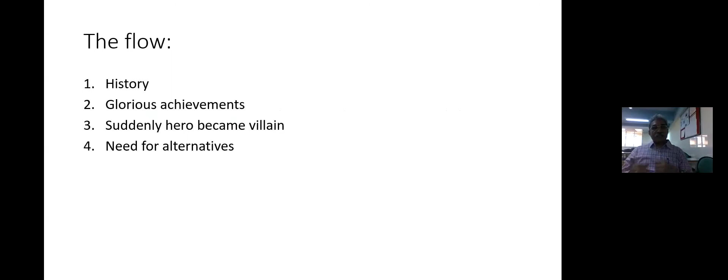So let me start with concrete for future. The flow of my presentation will be something like this. First, we will go through some history, then some glorious achievements, then we'll see how the once hero has become villain, the need for alternatives, the effort taken all over, then our contribution, and then conclusion.

So here, let us start with the history of cement concrete. Now we are familiar with cement concrete so much that we tend to forget from where that concrete has started. It is way back in 6500 BC, and to our surprise, in UAE, the earliest recordings of concrete structures by Nabataea traders in the region of Syria and Jordan. They created concrete floors, housing structures, and underground containers, which they used for grain and sometimes for water.

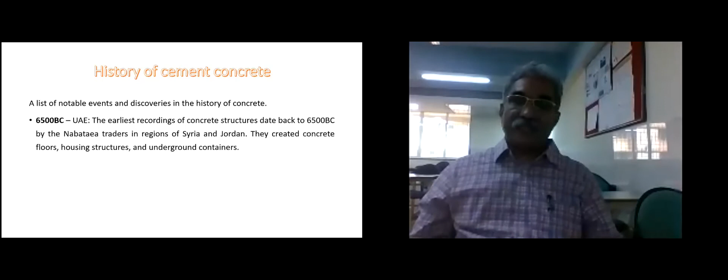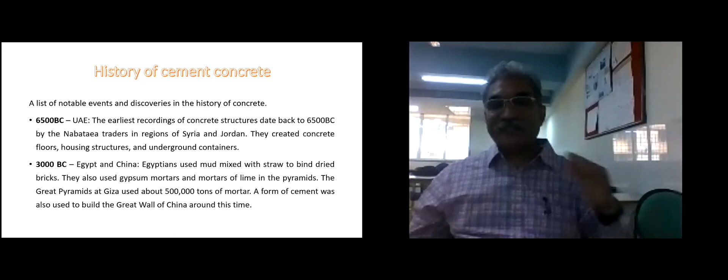Then in 3000 BC, in Egypt and China, we all know about Egypt, pyramids and all. Egyptians used mud mixed with straw to bind dried bricks. They also used gypsum mortar and mortars of lime in the pyramids. This is available in history, and the documents are also available. The Great Pyramid at Giza used about 500,000 tons of mortar. A form of cement was also used to build the Great Wall of China around this time.

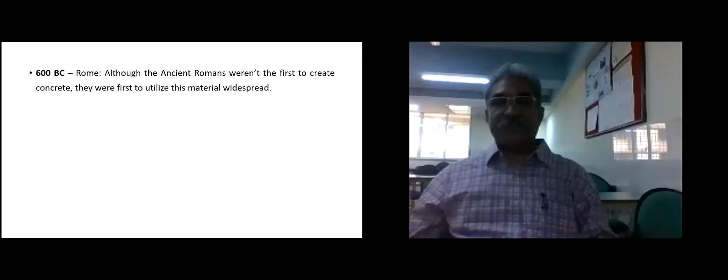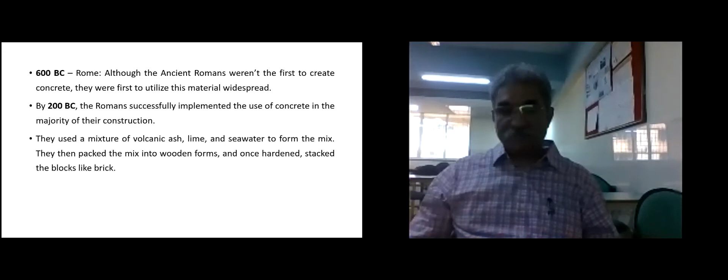Now coming closer, in 600 BC, Rome. Although ancient Romans weren't the first to create concrete, they were the first to utilize this material widespread. In 200 BC, Romans successfully implemented the use of concrete in the majority of their constructions. They used a mixture of volcanic ash, lime, and seawater to form the mix. They then packed the mix into wooden forms, and once hardened, stacked the blocks like bricks. After more than 2,000 years, Roman concrete structures stand tall due to their ingredients colliding with Earth's natural chemistry.

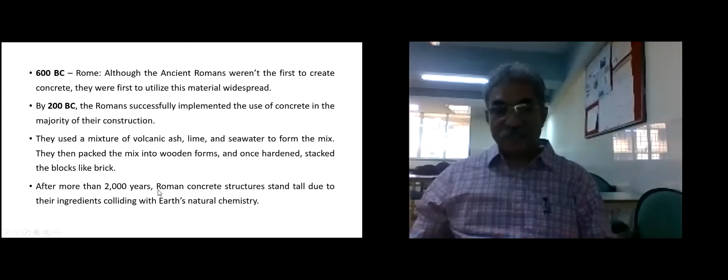So this is very important, we need to remember this, and we'll have to act on this only now, as the time is again changing.

So technological milestones, if we look at this: during the Middle Ages, concrete technology crept backward. After the fall of the Roman Empire in 476 AD, the technique for making pozzolana cement was lost until the discovery of manuscripts describing it was found in 1414. This regenerated interest in building with concrete.

In 1824, we all know Joseph Aspdin invented Portland cement by burning finely ground chalk and clay until the carbon dioxide was removed. Aspdin named the cement after high quality building stones quarried in Portland, England, because this quarry was situated in Portland, and therefore he named it Portland cement.

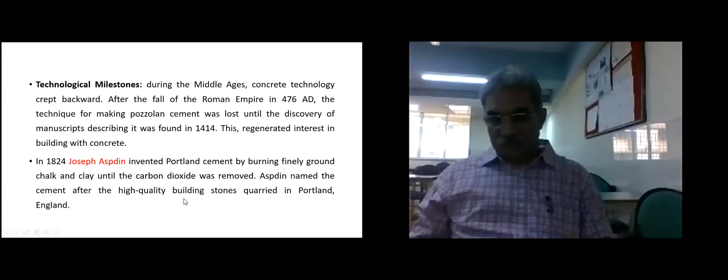In the 19th century, concrete was used mainly for industrial building, not for housing. The first widespread use of Portland cement in home construction was in England and France between 1850 and 1880 by Francois Coignet, who added steel rods to prevent exterior walls from spreading. This was the start of reinforced cement concrete.

Now, if we look at the timeline: in 1830, lime and hydraulic cement was produced for the first time, in Canada. In 1849, reinforced concrete was invented by Joseph Monier. In 1854, the first home constructed using reinforced concrete was built in England by William Wilkinson. In 1889, the first reinforced concrete bridge was built.

In 1891, George Bartholomew poured the first concrete street in the US, and it still exists. In 1902, Auguste Perret designed and built an apartment building in Paris using steel reinforced concrete. In 1904, the first concrete high-rise building, called the Ingalls Building, was constructed in Cincinnati, Ohio. In 1913, the first ready-mix load was delivered in Baltimore, Maryland.

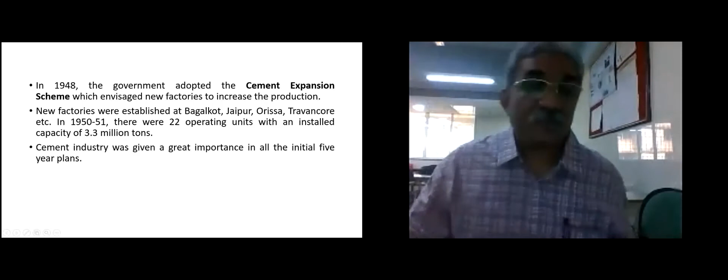See how much importance was given, that it was a major commodity in our five-year plans. The target of the first five-year plan was to raise the installed capacity to 5.4 million tons, which was achieved. The industry has grown many folds since then.

Many of our listeners might know that in that particular era, cement was on rationing. If we wanted to build a house, we needed to take permission and get a sanction for the amount of cement, and because of that, black marketeers were there—it was a great black market business at that time. I remember this because, though I was a child, I was interested in this industry since the beginning, and finally I became a civil engineer.

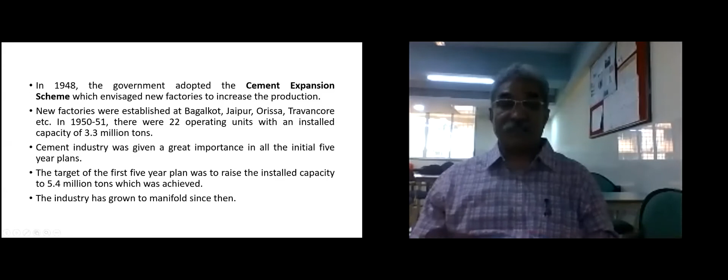Now, because of these great achievements, we have given so much emphasis on cement production, producing cement and concrete, and constructing so many buildings, creating so many facilities for human beings.

Now, how has this happened that this hero of ours, cement concrete, has become a villain, and why do we need to treat it as a villain?

The first thing is manufacturing. This stone-like building material is responsible for 7% of global carbon dioxide emissions, which is more than what comes from all the trucks in the world. That means if we stop all cement industries in the world, we would reduce global carbon dioxide emissions by 7%.

So this is an alarming thing, and because of this, the greenhouse effect is looming over the entire earth. Very recently we experienced in our Chamoli district in Uttarakhand that a great glacier has fallen, and I don't know what we will hear in days to come, because more than 150 people are still missing.

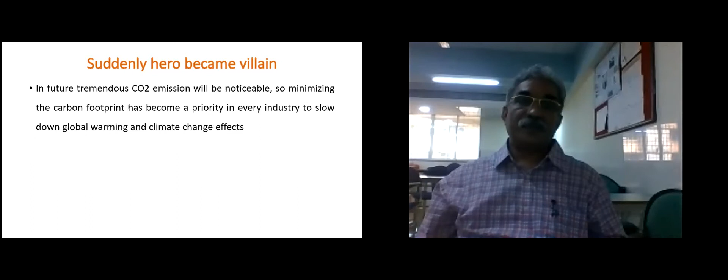Now, very important question: who is responsible for all these things, whatever has happened? So the obvious answer is we. We are responsible. Now, in what way are we responsible? How can we blame ourselves?

The main reason is we have increased our greed to the extent that even today we are unable to see the end of it. We have become so greedy that a family earning above average will start thinking of buying or constructing a home, and we don't want to live in a joint family. We have become nuclear families, and because of that each person now has two dwelling houses - that is our greed. One house in Mumbai, one nearby as a holiday home, and one more at our native place. So our greed keeps increasing and there is no end to it.

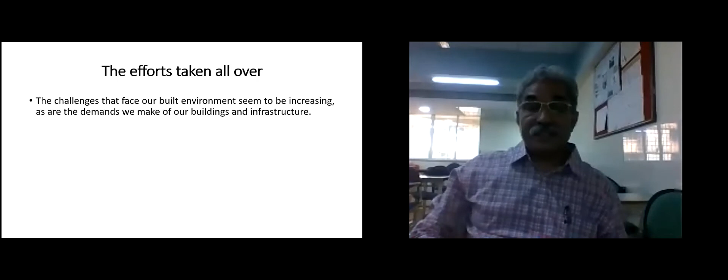We need robustness and solidity to feel safe and secure. We must build in flexibility to climate change and be able to deal with overheating, flooding, and storms, all in an increasingly urban environment where high density housing can make some of these issues worse. We must ensure solutions are low carbon, material efficient, and without compromising quality and performance standards such as fire safety and non-combustibility.

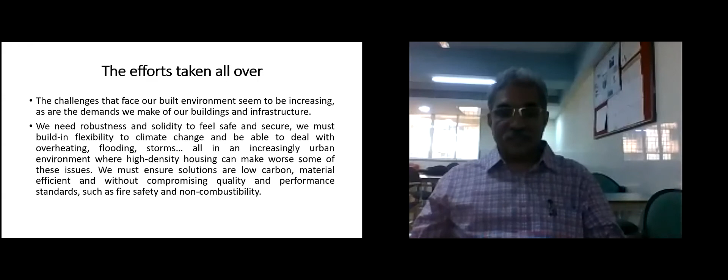So these are our requirements, and for that we need to pour more concrete. So this is a vicious circle, and we are supposed to put a full stop somewhere. So now let us see some innovations made in this direction globally.

So the first one is self-healing concrete. There are many researches going on in self-healing concrete. Then 3D printed concrete, eco-friendly concrete, pervious concrete, Martian concrete, living concrete, and graphene - that is one of the substances we will be using in concrete.

Then polymer concrete. So self-healing concrete - this is a concept based on the fact that no matter how carefully concrete is mixed or reinforced, it eventually cracks. And those cracks can lead to collapses.

Now, how do these cracks lead to collapse? We know that because of a crack, moisture content enters the concrete and reaches the reinforcement. The reinforcement gets corroded. That corroded material of reinforcement, being ferrous material, occupies more space, and because it occupies more space, it widens the crack.

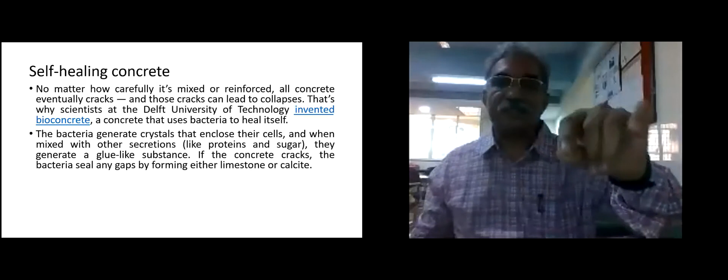See what happens in this self-healing concrete, where there are chances of getting concrete cracked. There, within the vicinity of that possible crack, we put a conduit of certain material which will get broken very easily. That conduit will have this solution, and once the crack appears, that conduit will get tension, and because of that tension, the conduit will crack again or break at that particular point, and that substance will come out and fill the gap.

But then we are supposed to see its feasibility over the period. Suppose that beam has this fitted in it, because beam may get cracked very easily, and sometimes it will not get cracked for a longer period, say 5 years. In those 5 years, the inside tube conduit will also get hardened, and when it was required, it will not crack, so the beam eventually will fail. So self-healing concrete may not be the solution as a permanent solution on which we can rely for years.

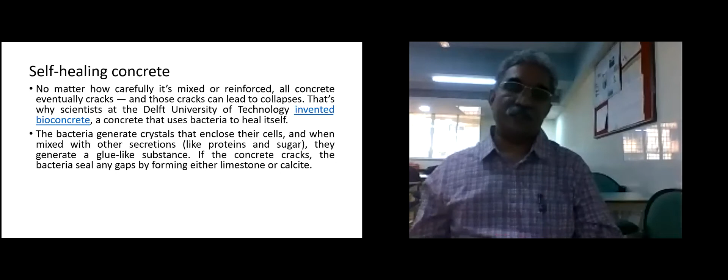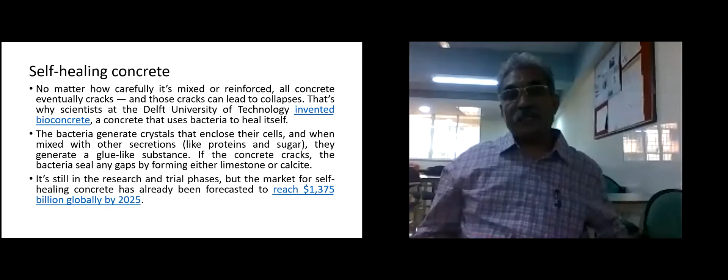So it is still in the research and trial phases, but the market for self-healing concrete has already been forecasted to reach $1,375 billion globally by 2025. So people have started investing, but still we have a doubt on its feasibility.

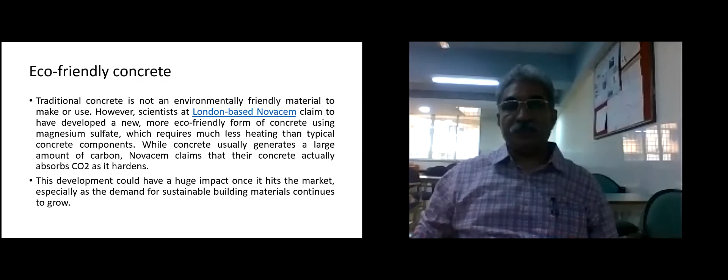This development could have a huge impact once it hits the market, especially as the demand for sustainable building material continues to grow. So in future, we may see such pictures where concrete is allowing vegetation to grow on it. Now, one of the inventions is pervious concrete.

This pervious concrete is another eco-friendly concrete solution gaining traction within the construction industry. Traditionally, concrete is impervious, meaning water runs off it, requiring the architect to direct its flow in a focused way, in the desired direction the accumulated water needs to go.

Design flaws and unanticipated weather patterns have unfortunately led to many cases of urban flooding, erosion, pollution, and other serious ecological issues. Because of imperviousness, once we have poured the concrete on the ground, it will not allow water to percolate, and because of that, water logging will happen in the areas, creating further inconvenience and other difficulties.

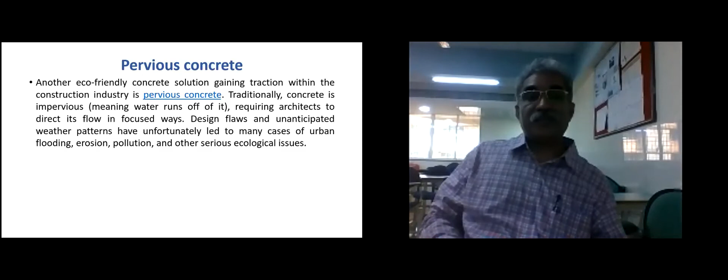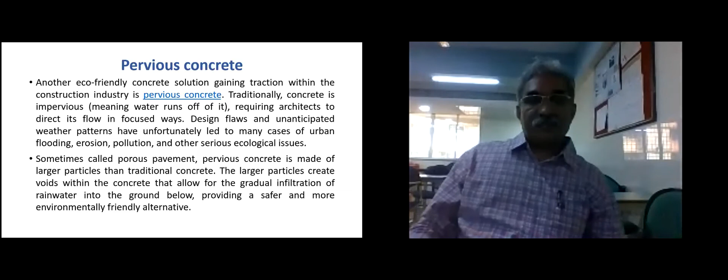Sometimes called porous pavement, pervious concrete is made of larger particles than traditional concrete. These large particles create voids within the concrete that allow for the gradual infiltration of rainwater into the ground below, providing a safer and more environment-friendly alternative. Once this concrete is on the ground, in the rainy season water will percolate through it and go to the ground, so there will be no more water logging.

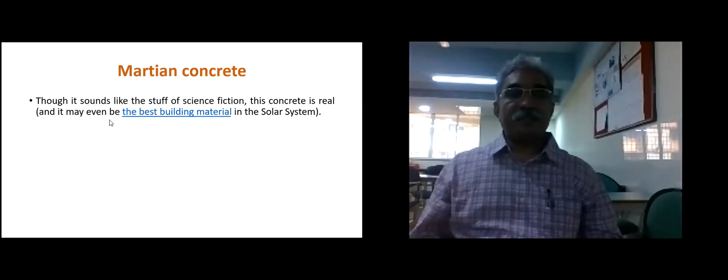Then another concept came: Martian concrete. Though it sounds like the stuff of science fiction, this concrete is real, and it may even be the best building material in the solar system. In response to scientific interest in building on Mars, a research team at Northwestern University created a form of concrete that can be made with material native to the red planet, meaning all the material they gather will be at Mars only, and they will create the concrete there itself.

The team tackled the challenge of limited water by turning instead to sulfur. It's readily accessible on Mars, available there in abundance, and when heated to 240 degrees Celsius, it melts into liquid. This creation is also durable enough to withstand meteorite impacts, a key element needed to create viable shelters for humans.

So when we go to Mars, we are trying to create this concrete here itself and be ready to create it on Mars too.

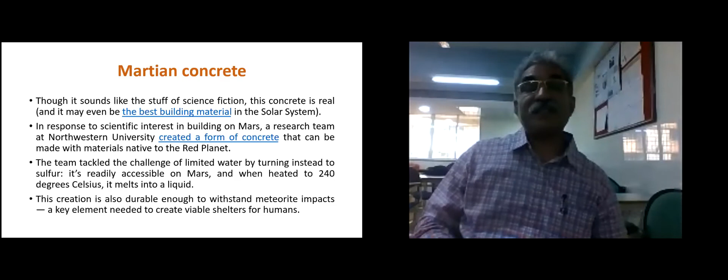Now, living concrete. The Concrete Futures exhibition featured examples of new and experimental forms of the material, including living concrete, developed by the Bartlett School of Architecture, described as an architectural bark. It can host species such as algae, mosses, and lichens to create more sustainable green walls that require no maintenance and potentially absorb pollution and noise in cities.

In 2018, eight prototype panels were installed at St Anne's RC Primary School in London.

In this particular type of concrete, the pollens of this material, vegetation like algae, mosses, and lichens, when in a dry season, will just become inactive. They will not die. They remain in the clay accumulated in folds of concrete. And when water gets poured on the concrete, they will again come into life and vegetation will start on the walls.

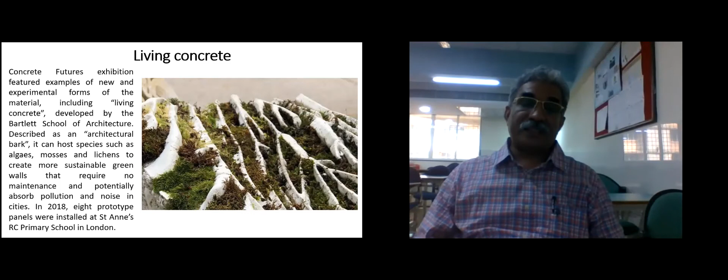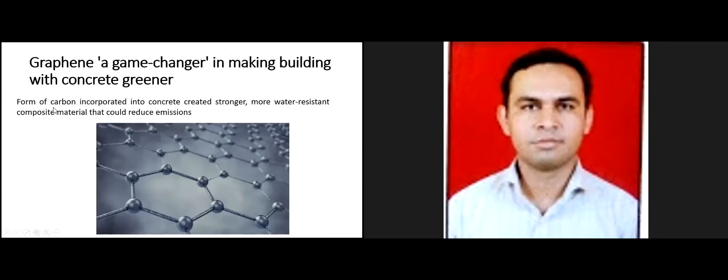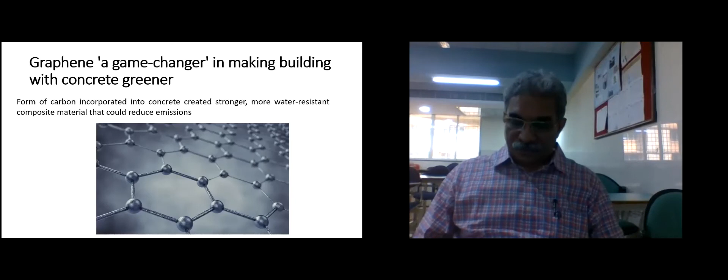Next, graphene. This is a game changer in making buildings with concrete greener. This form of carbon incorporated into concrete creates a stronger, more water-resistant composite material that could reduce emissions. Now this is again that eco-friendly concrete idea, right? But this creates a stronger material, and we will see why we need a stronger concrete.

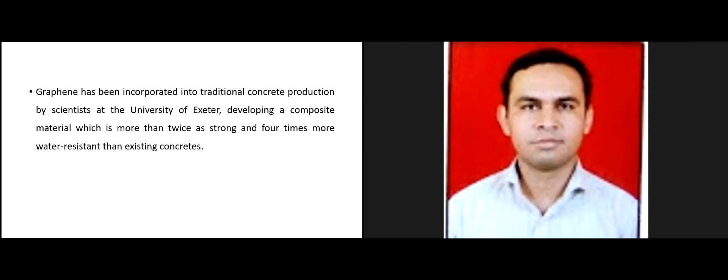Graphene has been incorporated into traditional concrete production by scientists at the University of Exeter, developing a composite material which is more than twice as strong and four times more water resistant than existing concrete. So this has very good properties towards strength and water resistivity.

The composite could be used directly on building sites, enabling construction of strong and durable buildings using less concrete and reducing greenhouse gas emissions. So when the use of concrete is decreased, we will be able to reduce greenhouse gas emissions. This is a very good step towards it.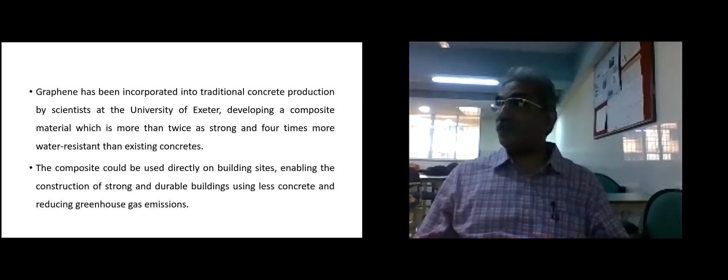It is clear, therefore, that there are numerous potential futures for concrete to continue as a material of choice in the design and construction industry. Having shaped our cities for centuries and facilitated rapid expansion and new heights, it is now time to consider how materials such as concrete can continue to support innovation by being the subject of innovation themselves.

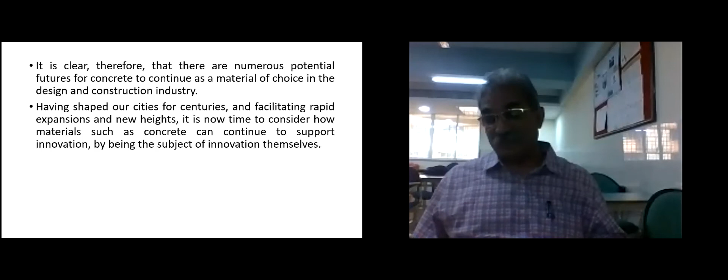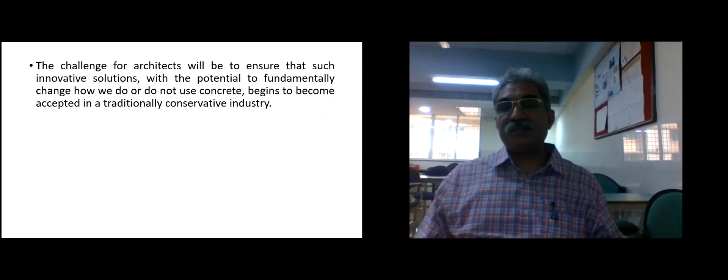The challenge for architects will be to ensure that such innovative solutions, with the potential to fundamentally change how we do or do not use concrete, begin to become accepted in a traditionally conservative industry. We were very much conservative before, but now things have changed; ten years ago we thought there was no substitute for concrete, but now we have one.

Otherwise, it is clear that the environmental impact of concrete as it is currently constituted will see the material overtaken by its green competitor.

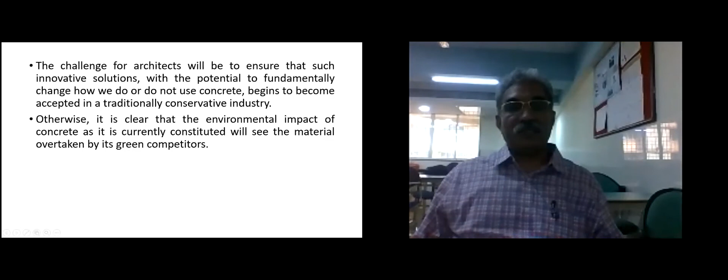Now, our contribution — certain case studies which we have done at our institute — includes recycling of building debris. Many institutes and many researchers are working on this and have published numerous papers. Then there's also the use of microsilica in concrete, and Martian concrete.

In recycling building debris, there are many buildings that are old, more than 60 or 80 years, and because of age and continuous weather effects in cities like Mumbai or coastal areas, we are demolishing old buildings and constructing new ones. Old buildings were maybe G+3, G+4, or G+7, but now we need to construct more than G+20 or G+30 buildings so that more habitation can be provided to people.

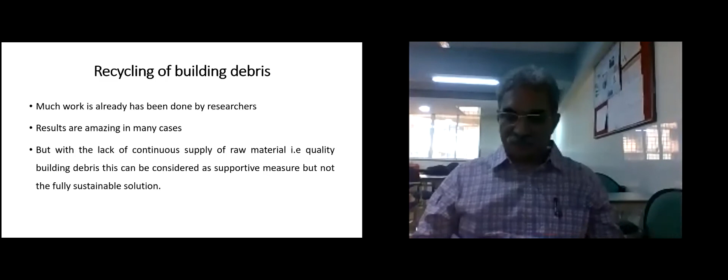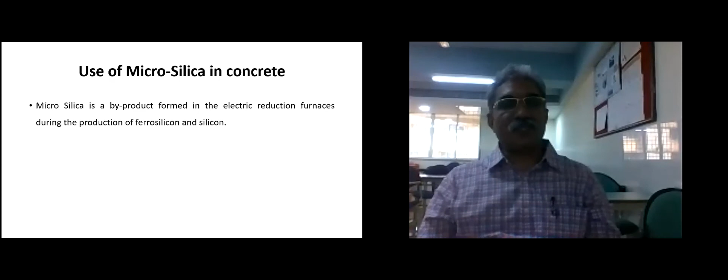Then one of our groups, along with me, tried microsilica in concrete. Microsilica is a byproduct formed in the electric reduction furnace during the production of ferrosilicon and silicon. The SiO2 is reduced with a carbon reducing agent to give ferrosilicon or silicon, and in the reaction zone, gaseous SiO is formed as an intermediate product.

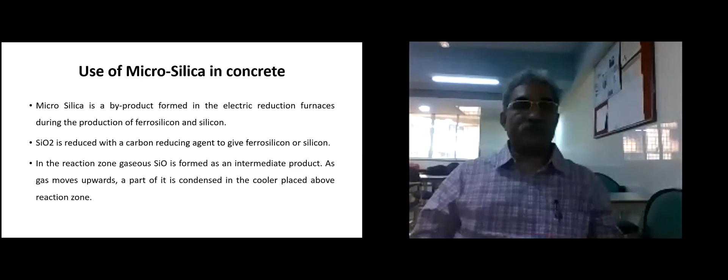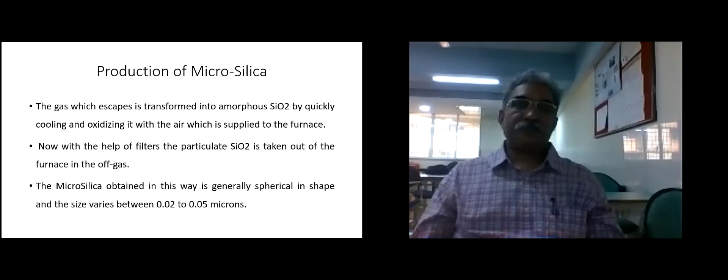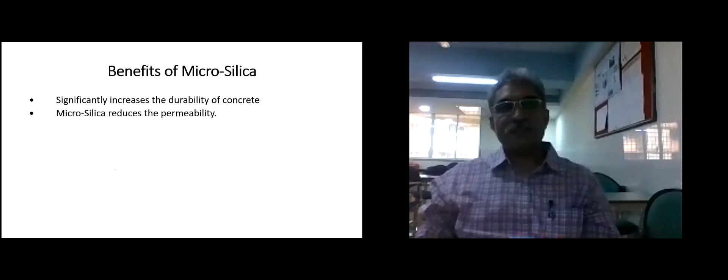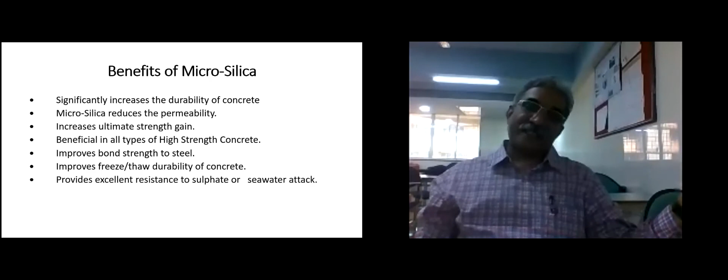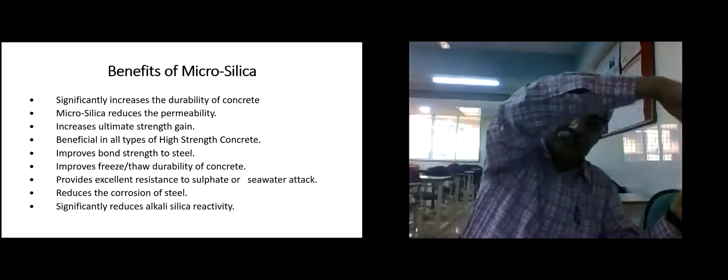Benefits of microsilica: it significantly increases the durability of concrete, reduces permeability, increases ultimate strength gain, and is beneficial in all types of high strength concrete. It improves bond strength to steel, improves freeze-thaw durability of concrete, provides excellent resistance to sulfate or seawater attack, reduces corrosion of steel, and significantly reduces alkali silica reactivity.

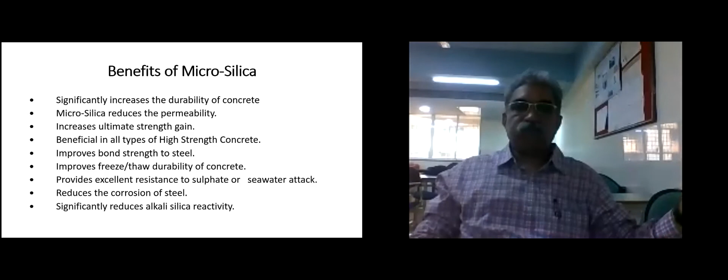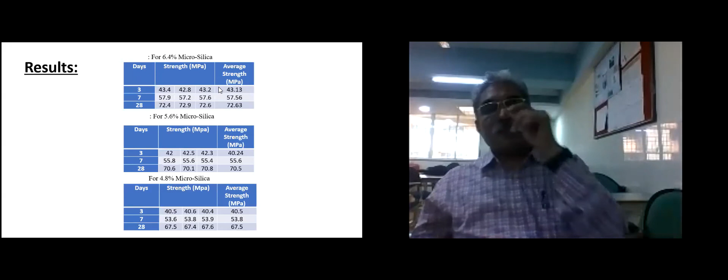Now the results. What we have done here: we mixed this microsilica at 6.4% by weight, not by volume, in concrete, and checked the strength of concrete. We took M40 concrete for this.

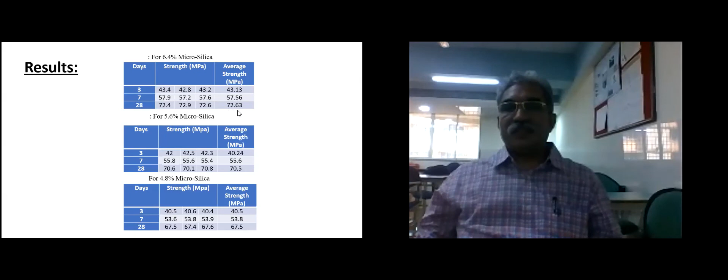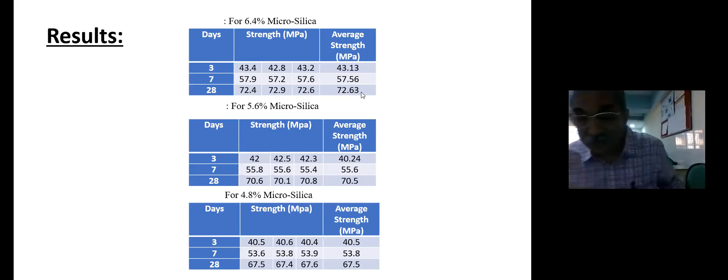For the M40 concrete mix, we created this concrete including microsilica, and to our surprise, on the third day we got average strength of 43.13. On the 7th day it was 57.56, and on the 28th day it was 72.63. So it is M40 concrete, and we are getting 72 against 40 — almost double. Not quite double, so we can take it as a 1.8 times increase in average strength.

This was the maximum we got at 6.4%; at 5.6% it was less, and at 4.8% it was even less. So we decided that we will use 6.4% as the microsilica proportion.

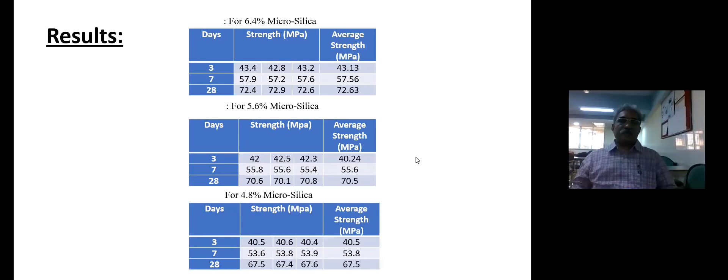This is the compressive strength chart. The same thing is depicted here in the form of a chart, that we got this 72.63 strength value.

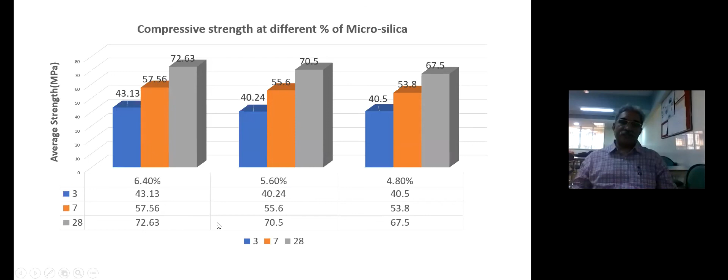Then we took a G+10 building with a C-shaped plan, and using ETABS we designed this building completely, considering earthquake and wind load and all load combinations. Then we compared this design.

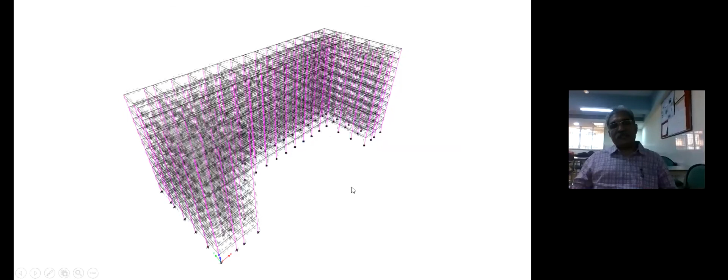Here we used three concrete mixes for designing the elements: one is M40, ordinary; another is M60, also ordinary; and M60 which we call the final one, which we got through M40 concrete using microsilica. Then we compared the major structural elements with the recent values available in the market, or DSR. So with M60 concrete, we got it as 75,24,933.

With respect to this, we took it as a datum: when we use M60 concrete, there was an increase of 9 lakh rupees in concrete in total cost, and when M40 concrete was used for designing, there was an increase of 38 lakh rupees in total cost. So we see there is almost a 30% reduction in cost if, instead of M40 concrete, we use M60 concrete with microsilica.

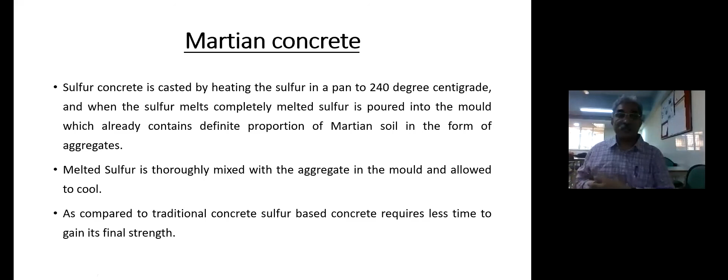Now you might be wondering how I'm talking about Martian concrete we are creating here. What we are doing is using aggregates available on Earth, as Martian soil is not available, and with the use of sulfur we are producing the Martian concrete, and that is why we have kept its name as Martian concrete.

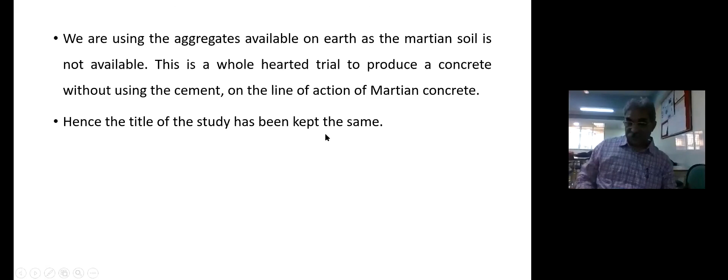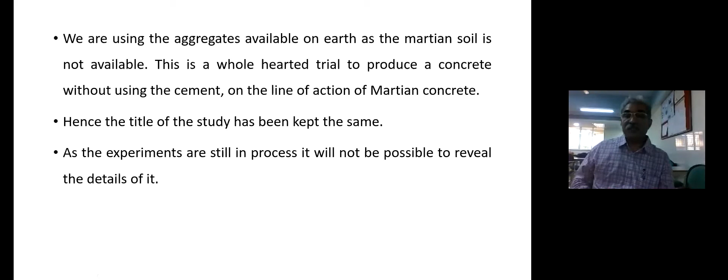Because the work is still going on, we are expecting the results, and experiments are still in process, so it will not be possible for me to reveal all the details. But once they come, whether positive or negative, we will be publishing that in a good peer-reviewed journal, so it definitely will be there in the literature.

So now, in conclusion, shall we go back to Stone Age? What to do with this carbon emission and greenhouse emissions and so many things? Earlier we used to dwell in huts and in nature. So shall we go back to Stone Age, or shall we start using what mix was used by the Romans?

You might be wondering, I have listed polymer concrete in my list, but I have not uttered a single word about it. What the Romans were using was nothing but a polymer concrete only. So now with different kinds of polymers we are creating that concrete, and that is the reason I have not said anything separately about polymer concrete.

Instead of going back to Stone Age, we can create high strength concrete so that minimum quantity is needed to create the desired structure. As for microsilica, we used it in one experiment and it proved very nice.

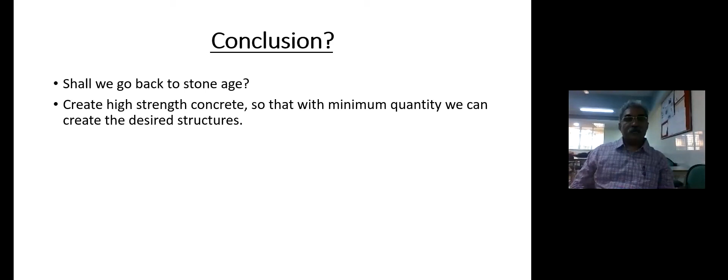Nanosilica is also available, but it was a question of procurement of nanosilica and its cost. Both were not suited for us, so we did not use nanosilica and completed our experiment with microsilica. That can be contributed here, and we can contribute more with different types of compositions, creating high strength concrete so that minimum quantity will be needed.

With high strength concrete and a changing design approach, I have put forward a design approach so that the structure should experience maximum compression in structural elements, so that concrete can be utilized to its maximum capacity. We all know that concrete is weak in tension but very strong in compression.

So if we can create the structure such that the maximum structural elements of the building remain in compression, with the help of high strength concrete, and if we assume that 10% of its compressive strength is the tensile strength, then for a concrete of M200 composition there may be 20 megapascal as the tensile strength of concrete. In that case it will take care of tension in the tension zone, and we will have to change our design approach, with certain design philosophy produced for this.

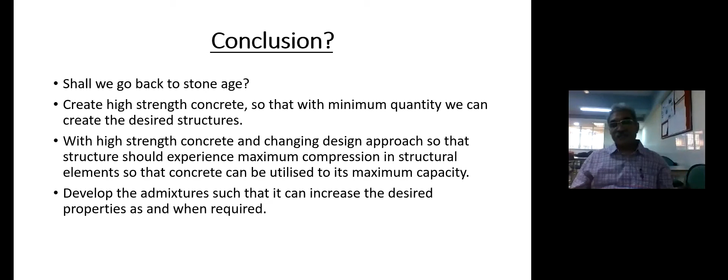We should develop certain admixtures such that they can increase the desired properties as and when required. We will not confine ourselves to using only one type of admixture in a single building. Instead, we should use different admixtures for different types of structural elements. Supervision and other things will definitely increase, but at the cost of greenhouse gas emissions, we will certainly go for that.

So in the end, we have started our bit. What about you? Well, that is all from my side. If you have any questions, I'll try to answer some of them.

I think this is actually a post-lunch session, and in a post-lunch session it is generally tiring to listen to such theoretical things. I am sorry, but concrete is a very dry subject to speak on, though it is very, very interesting to work on. So I'm sorry if I made you yawn or something like that.